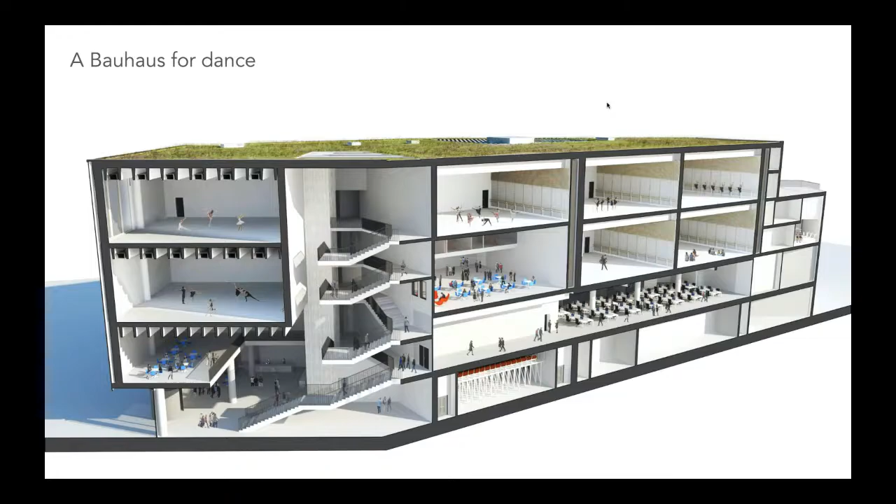I remember early on in the design process, working with Tamara, we said we could only fit in 6 full dance studios plus the large one. She said, no, we need to get all of the dance studios in, we need to get absolutely the full number in. And I said, well look, we've done our best, I really looked at how we can get all these in.

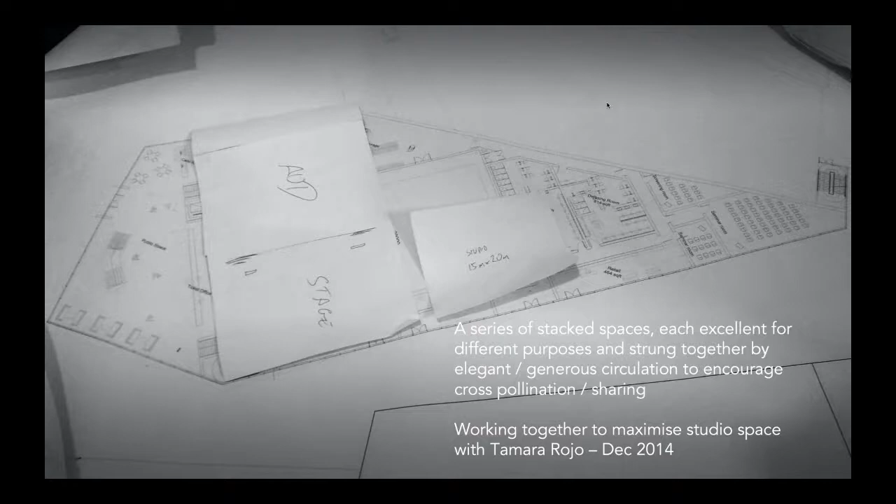This was Tamara, and this is how determined she is. She got our drawings, cut out pieces of paper, worked on them, and sent us back her version of how we moved things around. So I must admit, we can only take some of the responsibility. This was a 3-way design process - it was Space Studio, GHA, but very clearly Tamara was involved as well.

We then developed the project through a series of models, just to explain it to ourselves and also to explain it to English National Ballet. One thing they were absolutely fascinated by was not just how we accommodated and got the Rubik's cube to work by fitting in the number of dance studios, but what was the quality of the light and what was the quality of the circulation and the journey through the building.

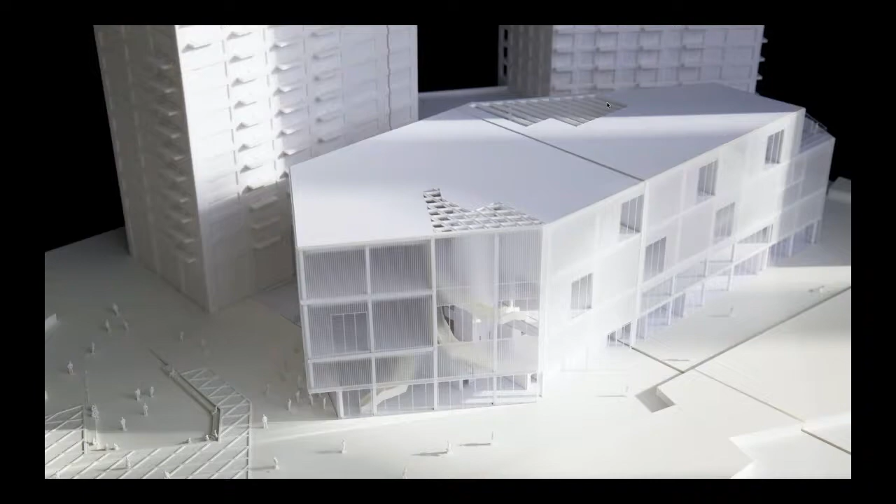So the next bit of the journey was once we developed the Rubik cube and managed to arrange all of the volumes in a really efficient way, the job then was, what's the architecture? How does the building work? And actually, the language of the architecture came from delivering the spaces in the leanest way possible. Our budget was about half, maybe a quarter, of what's typically spent on arts projects in the capital. And what we had to do was get every pound to go a long, long way.

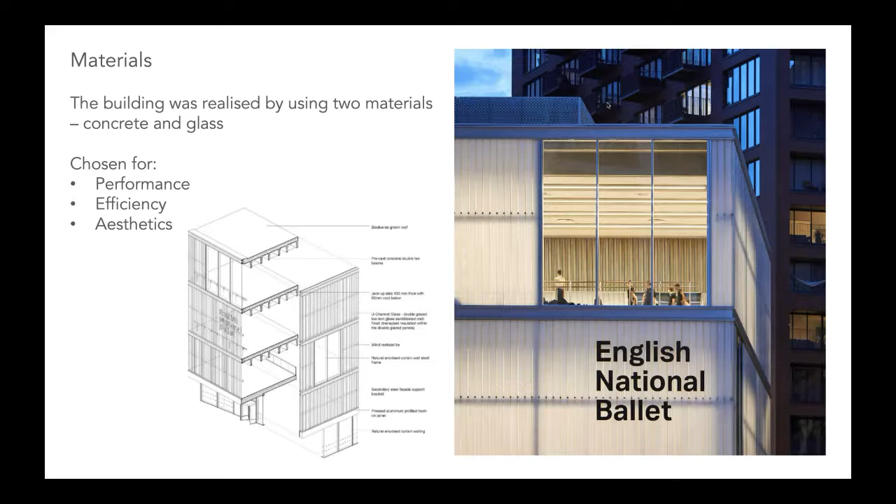So, as with many of our projects, we actually really enjoy the process of working when there's restricted resources. On this one, we started to think about the fact that we haven't got lots of extra money to decorate a building and apply lots of layers. So everything that was essential, including the structure, had to work really hard. So what we started to do was, working closely with the full team, engineers, acousticians, let the building start to tell us what it wanted to be.

One of the fundamental building blocks of this building is concrete. The reason we couldn't use steel, and it was largely a concrete building, was not only fire and thermal mass, but also the dance. When you've got up to 50 dancers in one space, all jumping up and down at the same time on a space which is 15 meters by 20 meters, over another dance studio which needs to be acoustically separate, you need incredibly stiff floors. And so that's why we went for these motorway structures - we borrowed a technology used for highways and bridges, and brought it into an arts building.

It was Dan Mulligan, who is our director partner now, that was leading on this. He stumbled across this structure, and it was an amazing tool, really. It gave us all the stiffness, very low cost, but also, by integrating the mechanical and electrical services, we ended up with a really integrated servicing strategy. So there's no exposed duct work - everything is managed within this. And on top of this concrete structure, we had the very specialized English National Ballet bespoke dance floor that we can't tell anybody about because it's a trade secret how it works.

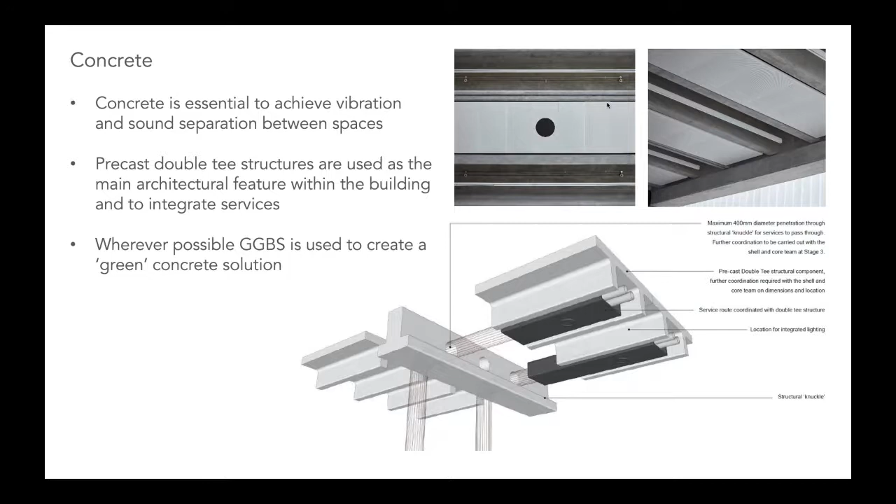Concrete's got a bad reputation in terms of being bad for carbon. But when we looked at this, we thought by using GGBS, which is blast furnace slag, as one of the aggregates, we could drastically reduce that. So as much as we could, we decarbonized even the concrete elements of it.

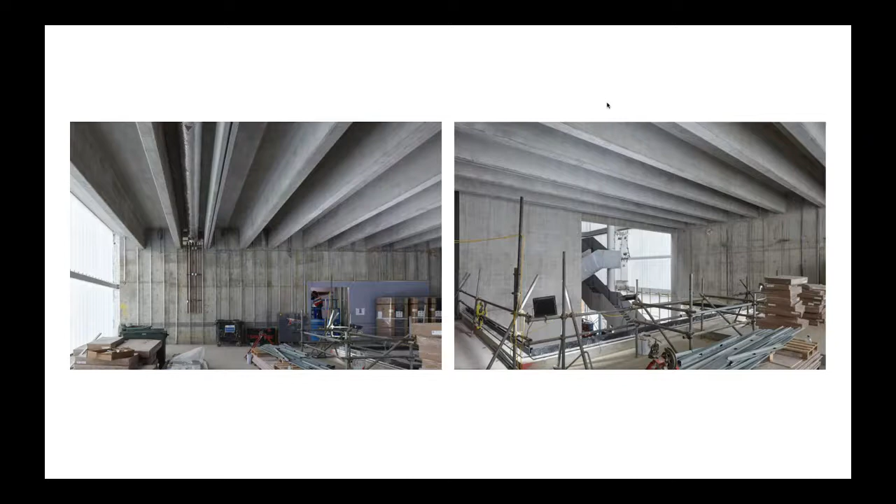These are some of those bridge structures which form the dance studios being lifted in, and what the building was like in its raw state. But what we wanted to do, and this is Tamara's vision for the building, was not to do a posh building. She wanted this building to be raw, so that when people and dancers were in it, they could sense that the building was lean and working really hard. They didn't want this to be a trophy arts project for the capital - they wanted it to be a working, gutsy factory for dance.

The other material which was absolutely pivotal to it - there's only really two materials in the job - is the glass facade. Pretty much all of the facades on this building are glazed because the ambition was to have brilliant quality of natural light inside these dance studios. The corollary of that was at night time, when the lights were on, the building became a lantern and you could sense movement and life within it.

But we had privacy and solar gain issues to manage as well in having a largely glazed building. So we used a brilliant material called Linit, which is a reeded planked glass solution, into which we can also incorporate natural translucent insulation. By sandwiching two of these pieces of glass together and filling it with daylight insulation, which is a foam, we can get diffused light in and get a lovely glowing building at night time. So it created brilliant quality of daylight in the daytime, but also allowed the building to become a beacon, a lighthouse, at night time.

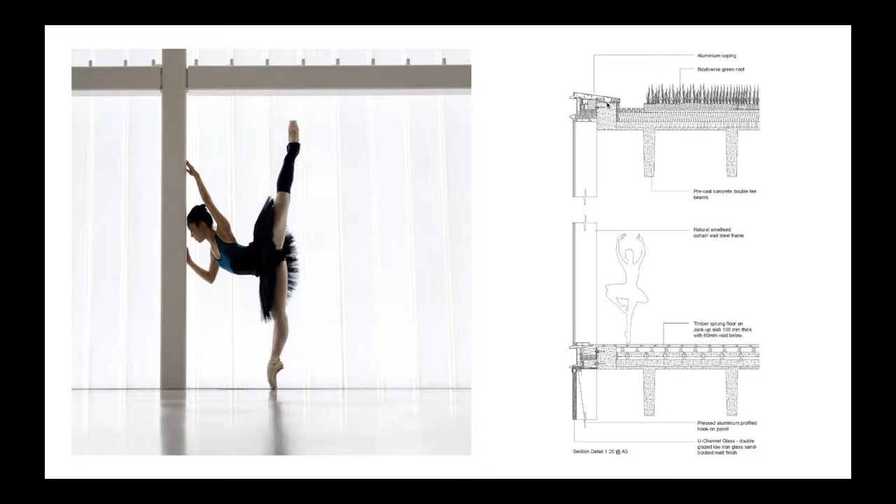This is some of the sections showing how we achieved that. One of my favorite buildings is the Maison de Verre in Paris, which again was very lean - it brought together just a glass building with a steel structure in that case. On this one, it was a very precisely crafted building, and both of these building products we didn't make, so they're off the shelf. All the maths was coordinated between the Linit panels and the double tee structures - all the maths was given to us to coordinate, and a huge amount of work went into organizing that.

And I've mentioned sustainability in terms of its carbon sustainability, which then went through to the environmental controls and using the thermal mass of the building.

But going back to the other dimension on its sustainability, economic sustainability was one of the things that the job had to deliver.

So having accessibility so the building could be used, renting out - it was a Porsche evening, and it's also been rented out to Cameron Mackintosh. So the building continued, until lockdown, to bring in a healthy revenue for the organisation while the organisation's on tour.

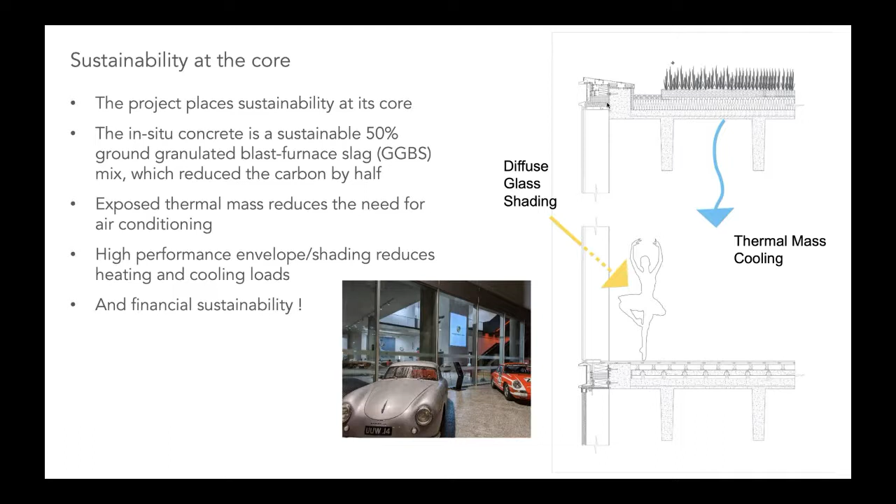I think that's really interesting - it's taking my mind back now to some of those early stages and things I'd actually kind of forgotten. So I'll try and pick some of those up as I'm speaking. Next slide, please. Next slide - I don't know who's moving the slides.

So just to clarify our appointment, we did win it in a competitive interview. I think we joined the project around RIBA stage 2, so this concept design was fully in place really. We had a competitive interview.

I remember getting a call when I was coincidentally down in London and someone saying, do you want to do this sort of training headquarters? We can't really tell you what it is. So we came for it, and then they obviously told us it was a ballet and did an interview.

And my colleague at the time, Joe Caldicott, put together a Prezi presentation that was sort of spinning around and had a kind of dynamic quality, which I think set the tone for some of the things we tried to do.

The probably biggest challenge for us, and for me personally, was to understand the world of ballet. It's not something that I'd ever been to, I didn't really know anything about it. And we spent a lot of time with the client, lots of consultation meetings.

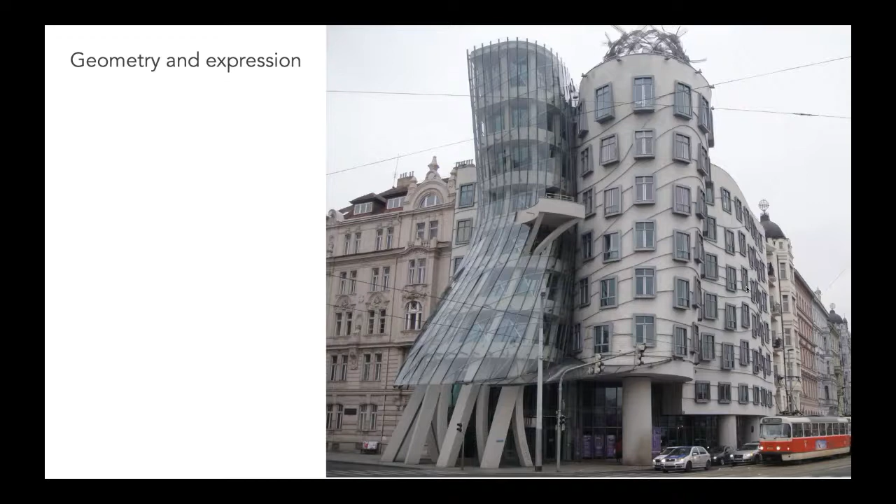Starting to think about what else was out there. This is the Gehry building, the Fred and Ginger it's called, supposed to be Fred Astaire and Ginger Rogers, two bits of a building that kind of dance together.

Then, it's interesting designing a home for ballet. It's not like a housing scheme or a university building where there's a million precedents. So Joe and I went down to see Rambert, and Tamara came with us, and that was a really interesting experience in itself. It was a very stylized, minimal type interior.

Then also went closer to home, the Birmingham Royal Ballet, Austin-Smith Lord, and a slide I didn't include but Jo happened to be in Texas, and she went over to the ballet in Houston, which I think, until the ENB, was probably the most renowned ballet facility in the world.

And then, of course, the really famous one, the bridge at the Royal Ballet School at Covent Garden by Wilkinson Eyre. And then a quote from Tamara: 'I want the space to echo the sound of creative Britain.'

So the first thing we did was take the plans from GHA, and really appreciated they've been through an incredible briefing process. We tried to look at some fairly minimal interventions that might allow us to bring some of these ideas to the fore. So you can see the reception desk - we thought about, could it be more dynamic?

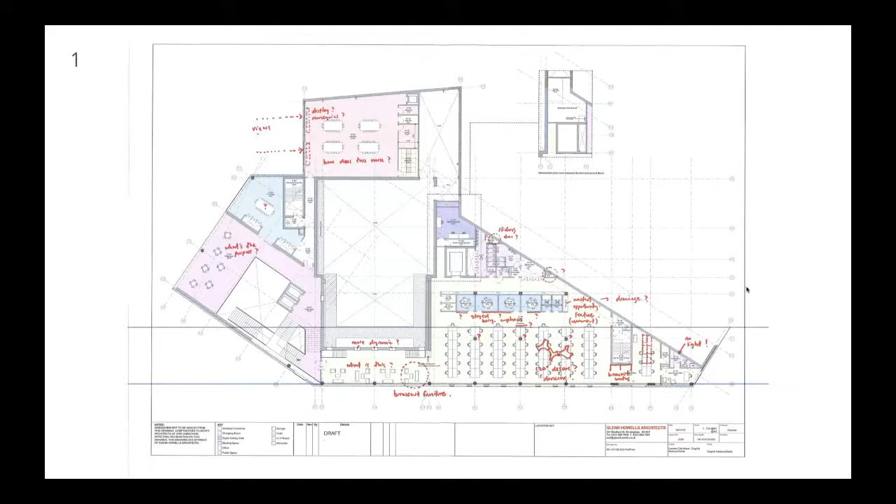Could it be curved? Started to think about some of the detail of the changing rooms, for example. Just going through the spaces, very small tweaks, just to see how we could try and bring a little bit of extra value to the project.

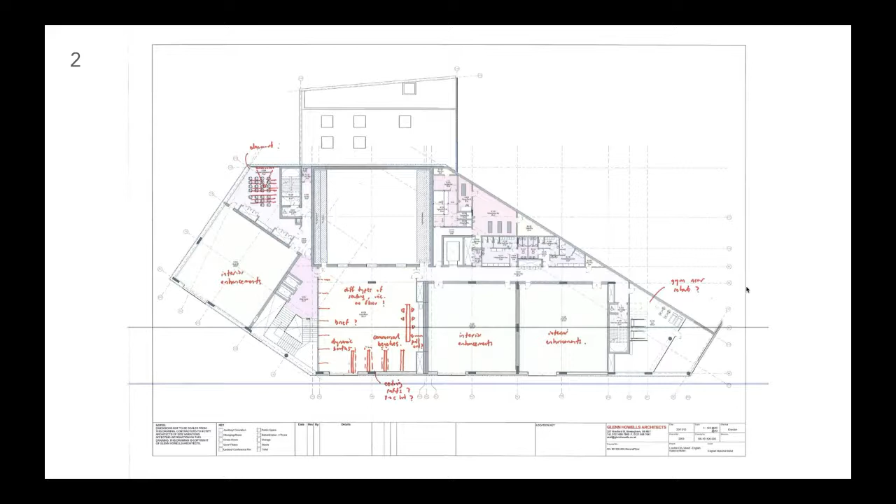And the green room there, that space in the middle that's got lots of red pen - I'll talk about that in more detail later, but that was interesting for us because there wasn't really a brief at that point. You can see it's actually very similar in size to the dance studio, so a large space to deal with there. Just smaller tweaks and so on.

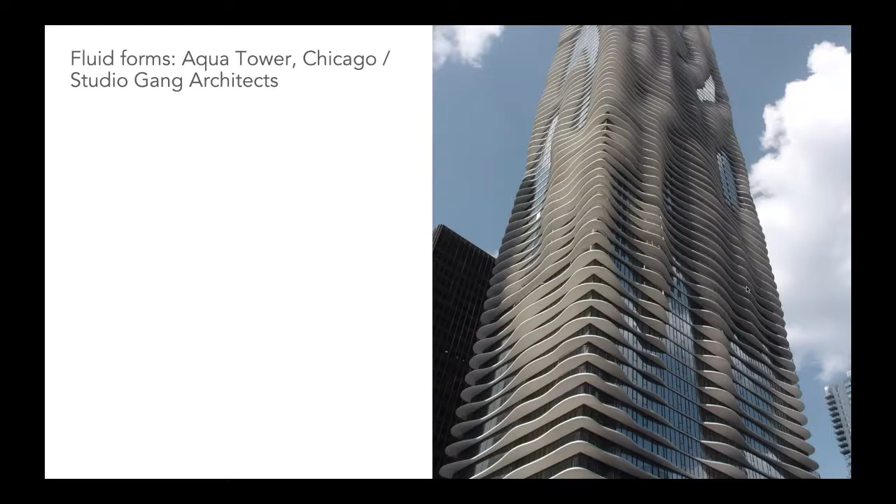Moving on to inspirations, the Aqua Tower, Studio Gang in Chicago, with this kind of dynamic quality. Tschumi's canopy at Parc de la Villette that sort of flutters along and gives that almost like a ribbon, really.

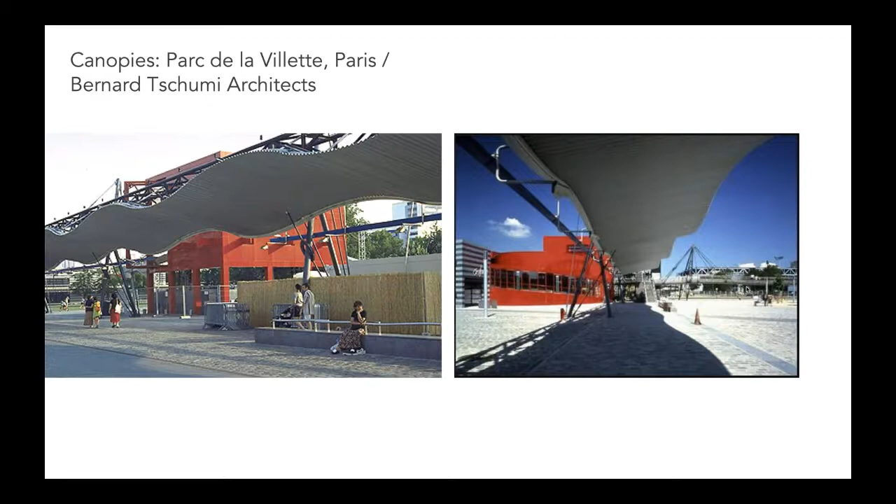And then the Casa da Música, because we'd seen the early concept drawings of the images of the foyer with the concrete, we got quite interested in this idea of embossing into the concrete, perhaps some of the graphics and so on.

And then a sculptural reception desk - this is just off the shelf, but obviously there's the ability to do a bespoke one. And then furniture that perhaps wasn't directional, that almost sat as objects in the space and gave a sense of movement.

So I'm just going to talk about three spaces really, and they had different levels of resolution when we started the project, and different levels of detail.

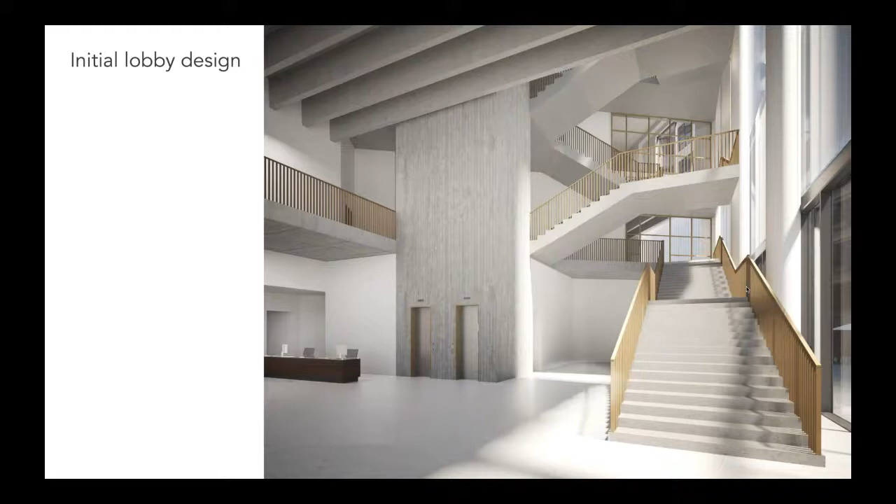So this was the initial lobby design. You can see the concrete there that I'm talking about, and the first design for the staircase and reception desk. We started to wonder whether we could get some more movement in the staircase.

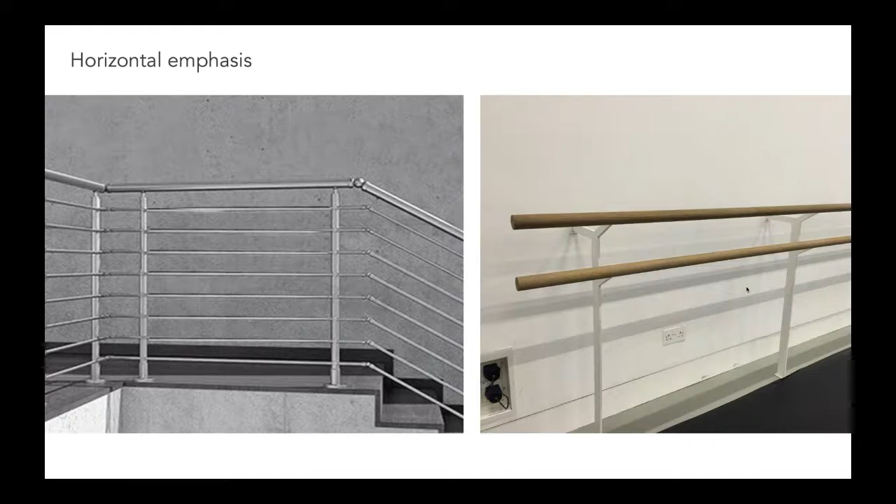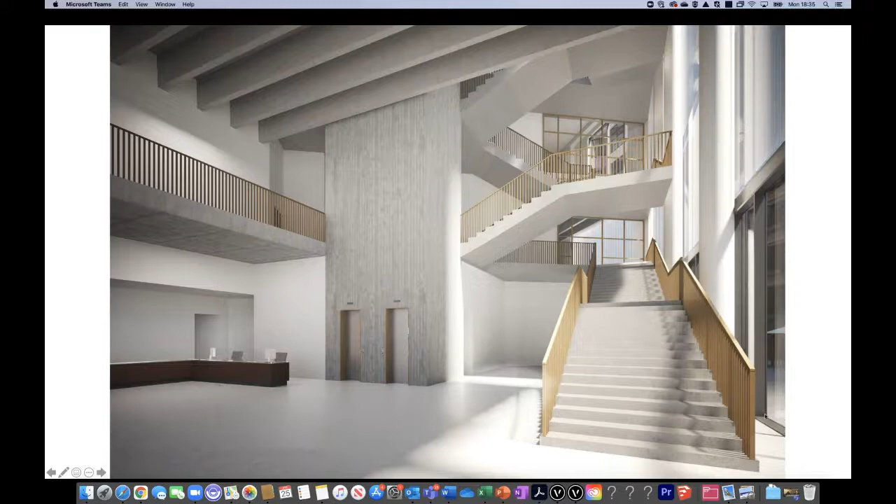So that's, again, just a reminder of where we started with the initial design, and then went through a whole series of iterations with the staircase.

First of all, just go back one - just marking up how it could have that almost double balustrade or double handrail, and making it more sculptural, thinking about the desk, for example.

And GHA modelled all of these up. This was a sort of timber, and you can see the ballet bars really that go into the distance, and the desk being more sculptural, and also the embossed concrete, going back to the Casa da Música.

This was just on the lift shaft - an idea of maybe something lighter that could be lit up at night, so much more in line with the concept of the overall building.

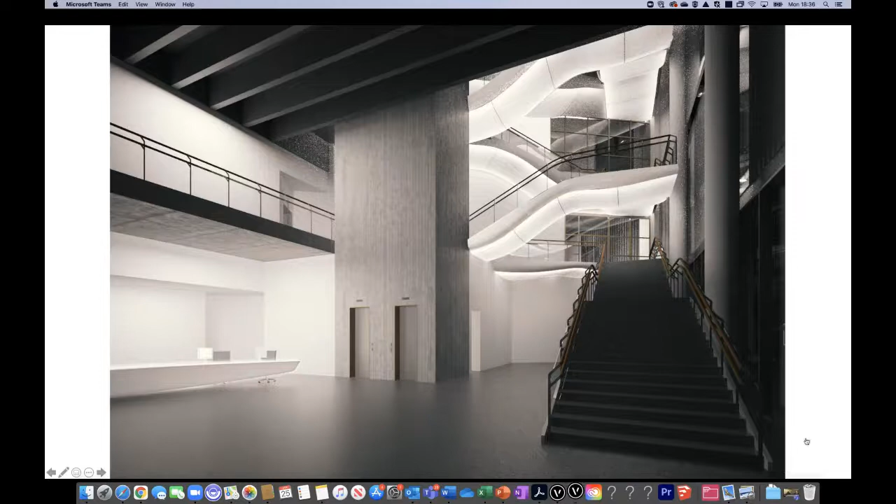I think this is what really unlocked the idea: this ribbon that winds its way up through the space. And so we got to this fantastic staircase design that... next slide.

Oh sorry, this was a winding one that came up and round. And then the next one, yeah, this is what we really hoped to achieve. I think we got it costed, and it was about £1 million in itself, so we had to rethink that. But you can see the principle here, and then it shoots out at the end. At this point you can see the logo is embossed into the plasterwork there.

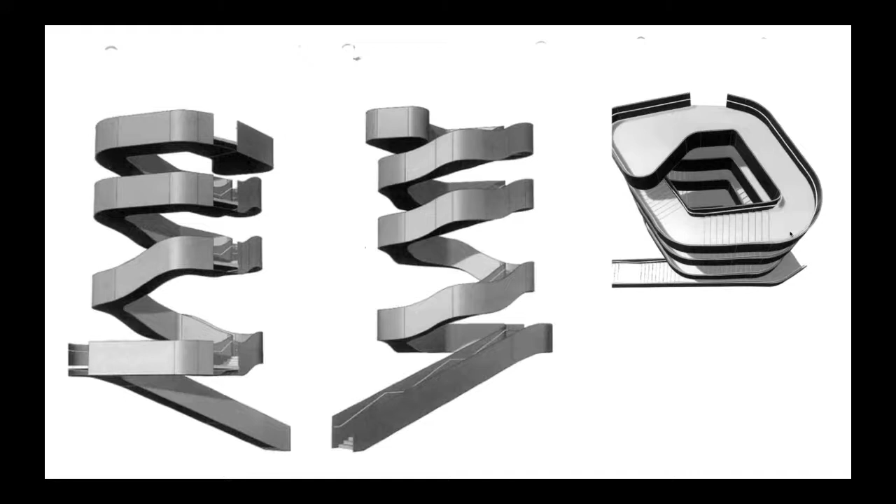This was actually my highlight of working on the project with Glenn and Dan and Rob and the team at GHA, when we started to get to this idea of the staircase that moved up through the space, and we moved from doing sketches straight into the studio. Somebody started to model it, and it was an incredible experience to spend so much time focusing on one element.

We'll come back to this later. This is the finished article.

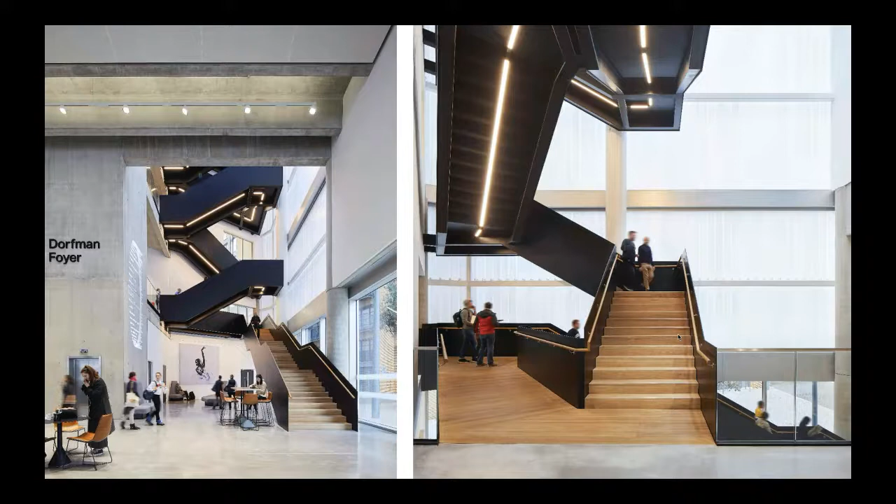So the second space I wanted to talk about was the green room. As I said earlier, it was effectively empty.

We also had this idea about what we started to call the pit, a sunken area. This was going back to Amber from the dance company, saying that people wanted to stretch out, they wanted to sleep everywhere. So we thought, if we have a pit that people can lounge around in and stretch, that could be quite fun.

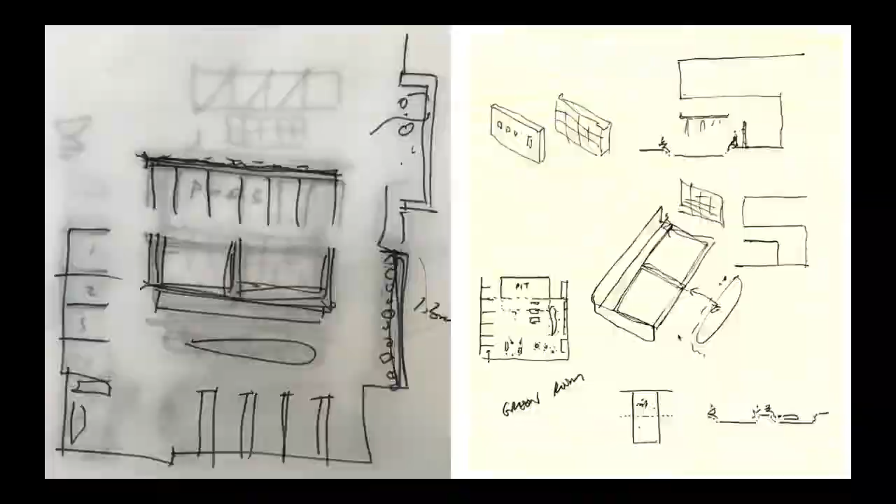What was very interesting about the green room is that the rooms from above look down into it. Again, you can see just a version there of the iteration.

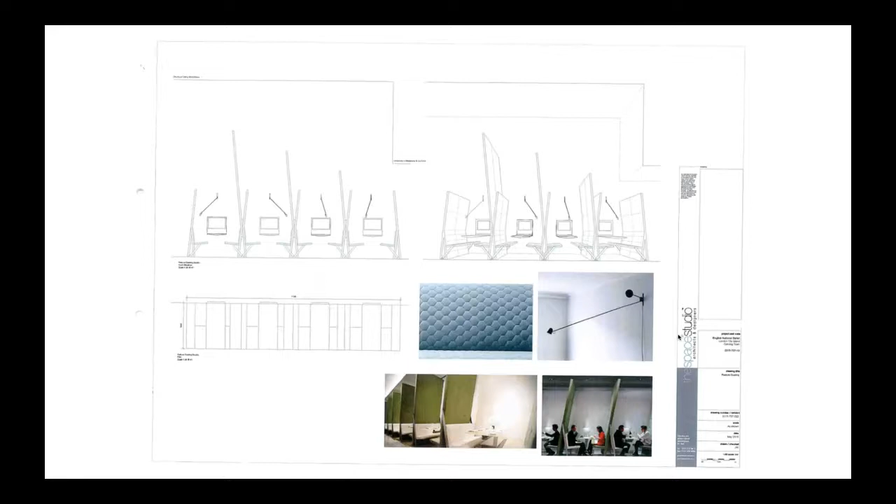Here's the booths that we designed that dance through the space, and they step down as you get to that mezzanine floor. Then the sleeping pods that I talked about, and I think my colleague Rachel spent an awful lot of time trying to find out upholstery details, mattress details and so on.

And then the dressing rooms, this is one where we very much inherited the space available. Going to the ballet, you could see the absolute carnage these are often kept in. But actually, the skip is one of the most important things for dancers.

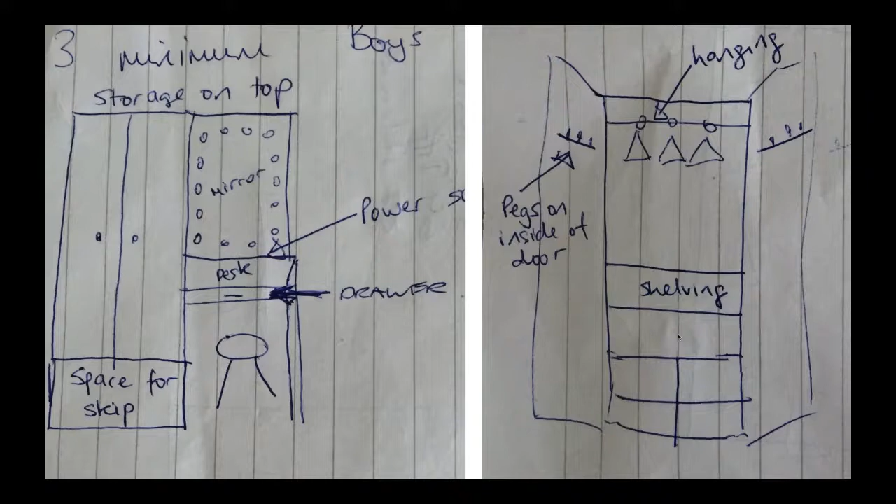As Glenn explained, the ballet is a touring company, so every dancer has a skip, and that skip needs to be put somewhere. This, I hasten to add, is Amber's sketch, not mine, in biro pen, but it talks about the absolute need for somewhere for the skip, somewhere for them to get ready, a mirror, storage, etc., places to charge the phone and so on.

And then just finally, in terms of the interior, the furniture selection and procurement. This was obviously the breakout furniture, but the office was a key area. For a long time, we explored these sort of pods that would give us some really interesting meeting rooms in the space.

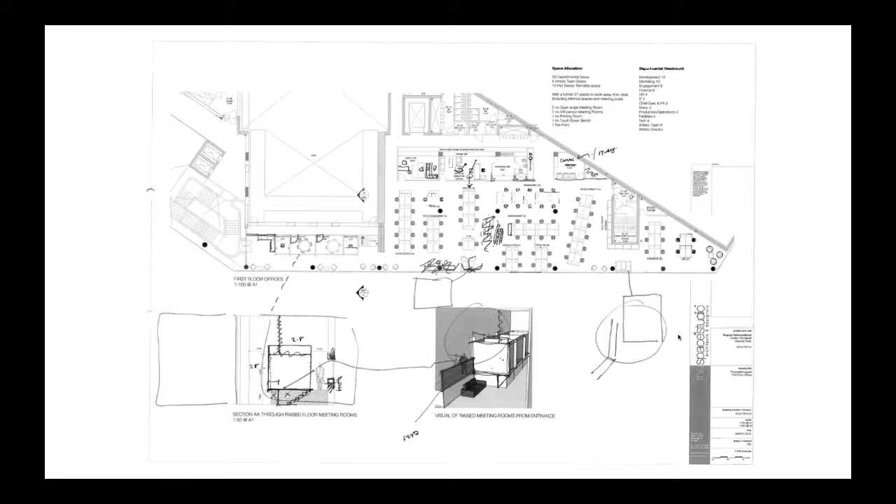And then just some other ideas for how that office could be laid out.

I remember one of the real challenges: in the first instance, Tamara's office and changing area was in the corner of the building, which was the prestigious area. And then finance and HR kept saying they needed more privacy. So I was tasked with the job of saying to Tamara that we needed to move her office into the core of the building. Being Mediterranean, she was very concerned about the daylight, but she said for the good of the team, she would give up that prestigious spot in the corner.

And I remember when we signed off the plan, I went to high five her in this meeting, and everyone was just aghast. Nobody touches Tamara, nobody engages with her like that, and she returned the high five, and the whole meeting breathed a sigh of relief, and we knew we'd signed it off at that point.

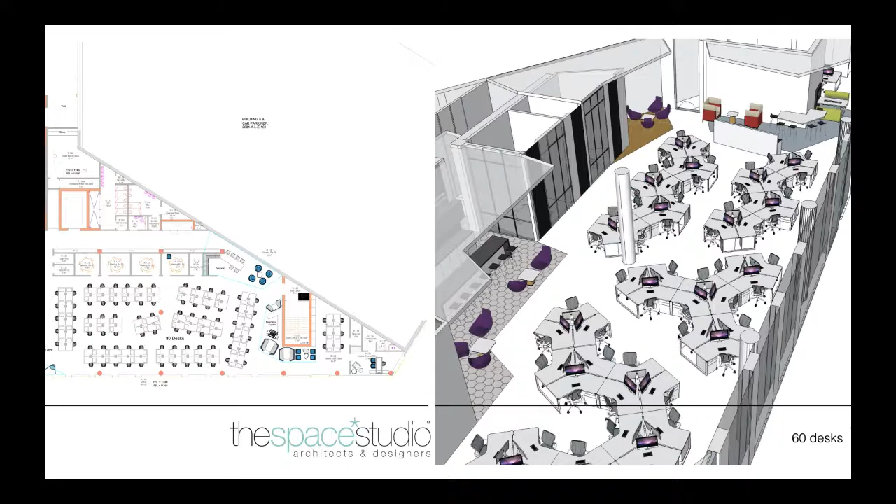And then just in terms of the furniture, we arranged a furniture day, mostly around Clerkenwell. We had about 15 representatives from the ballet who came round and looked at furniture, everything from desks and office chairs through to breakout furniture, reception furniture, meeting furniture, and so on. We spent a whole day going round.

And then that was pretty much the end of our involvement as the project went onto site. So I'll hand back to Glenn now.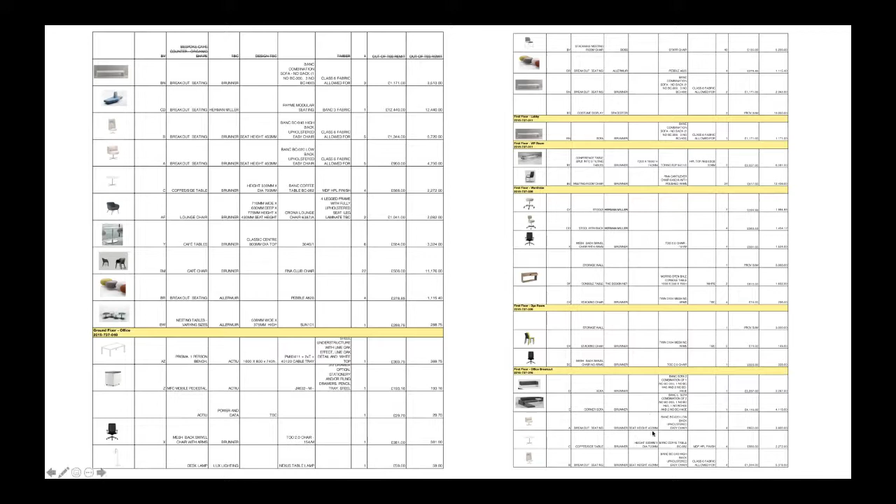Thank you. Can you hear me, Kevin? Yeah. What we're going to do now is jointly take you through the building. We've given a few tours to judging panels and to other architects and designers. What we've tried to do is show some pictures with some drawings as well, just to give you a feeling.

So we'll take you through as if we were walking through the building. This is the foyer. The first thing you see is the staircase that Kevin and I sweated with Dan and others on for so long. It was this balancing act, and at the end, I think the idea of it being a ribbon, Kevin, still holds.

It does, because even though it's made out of flat pieces for a number of different reasons, its solidity in the space and its differentness to the concrete - it's so much better that it wasn't a concrete thing, that it's a lighter thing and it climbs up.

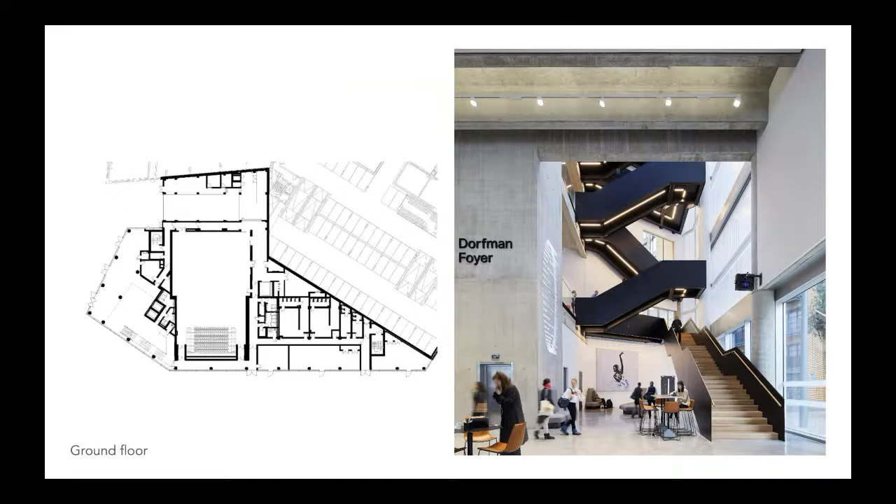And it's also, you can see how the building, how the staircase - because everything's working really hard on it. The handrails, the flat metal 20mm sheet handrails, are part of the structural solution. But there is this idea that the staircase is a tool, it's a communication device. It's wide enough that you can hover and have conversations. And very importantly, as you go up through the space, you can see all the different parts of the building.

And what was also good, you can just make it out on the left hand side, it had a kind of split in it depending on how you arrange it. So as you arrived at the front door, you could actually see through the furniture to the reception desk. That was a really instrumental piece for us, and it could be split up and moved around.

A big part of the project was revealing the story of the building, the concrete and glass story of it, from the foyer space. So even though it was essential for the dance studios, we didn't want to change the language of the materials and the vocabulary of the building in any of the spaces.

This is an informal space on the first floor, used for receptions, for fundraising activities, and actually just as a living room. It also brings in revenue because it can be hired out for events as well.

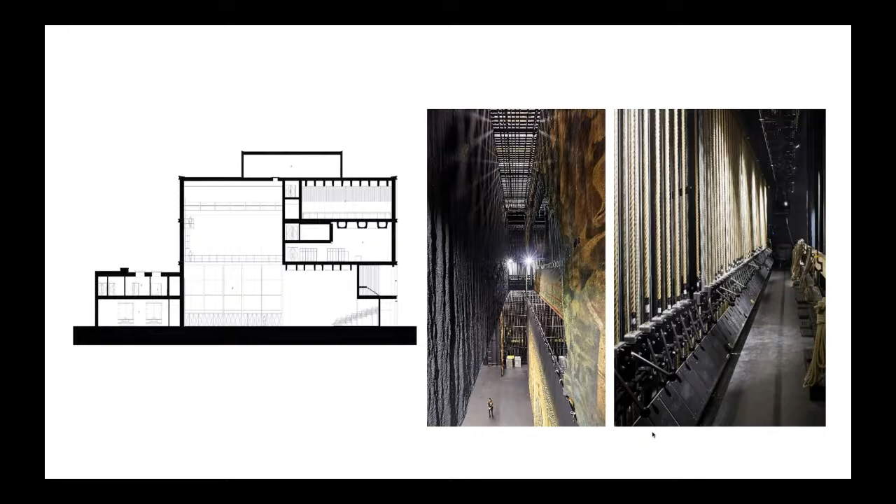I suppose this space, which was Studio 1, was the hardest working and the most difficult to work, because it's like every other dance studio, but as you can see from the section on the left hand side, it's also got retractable seating. So this is a little mini version of the London Coliseum. It's got a very large stage with wing space, and very importantly, a full fly tower. When you go in there, it's like a Rubik's cube that everyone can't believe, because this is on the ground floor, but the height of the fly tower goes all the way up to the tallest part of the building.

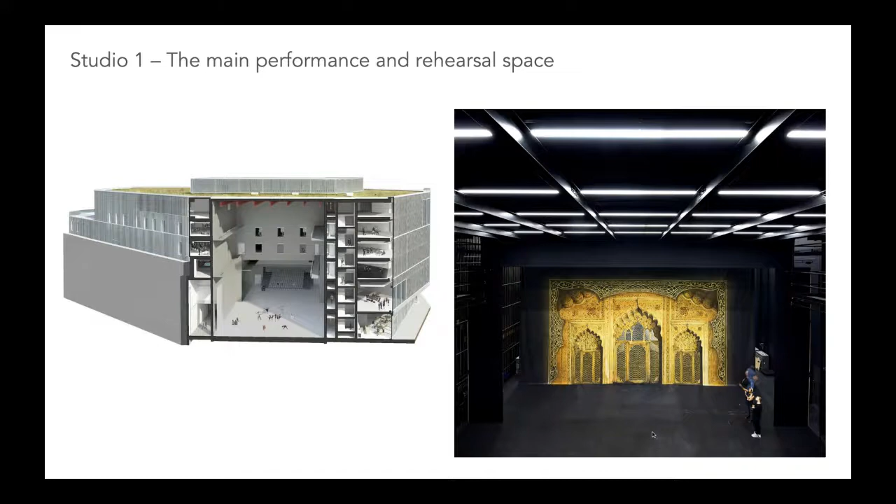So this was the full technical setup they got, with full counterweight rigging. It's got all of the hanging and flying facilities, and it's also this space that organisations like Cameron Mackintosh use for their productions. They can hire it out to other producers to bring in money.

And then these plans just start to show how we then manage the larger spaces versus the smaller ones. The smaller ones wrapped around them, every little corner of space was used.

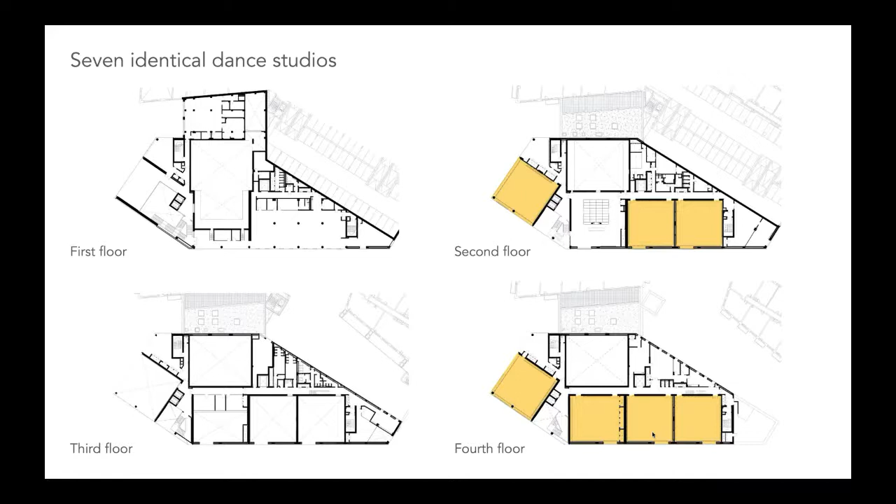This is the one job where, because the brief included hydrotherapy - a swimming pool in there for therapy - workspace, sewing space, every corner of this building was made to work very hard, wrapped around the engine, which is these dance studios. And this shows the quality of light and the volume inside those dance studios.

And then wrapped around those spaces such as this, which we worked on, and Kevin's team also worked, understanding what the adjacencies were. So you got dyeing rooms, fabric rooms, stitching rooms, storage spaces. This was a factory wrapped around all of this. So it was a factory for dance, but it was also a manufacturing space for everything else that needed to go on tour.

I think we had an hour and a half meeting with the lady that made the shoes, for example, telling us about the shoes, and that depending on your rank as a dancer, you get more shoes per month.

The other really fascinating one, similar to the space that Glenn was talking about, was that they keep records of all of the costumes they've done previously and material samples, so that next time a particular ballet goes on the road, they've got all of that information for continuity purposes.

So how all of that information is stored and the size of those books and so on, it's an incredible amount of detail that you probably would never think about when you see this, because everything has been thought of and designed for.

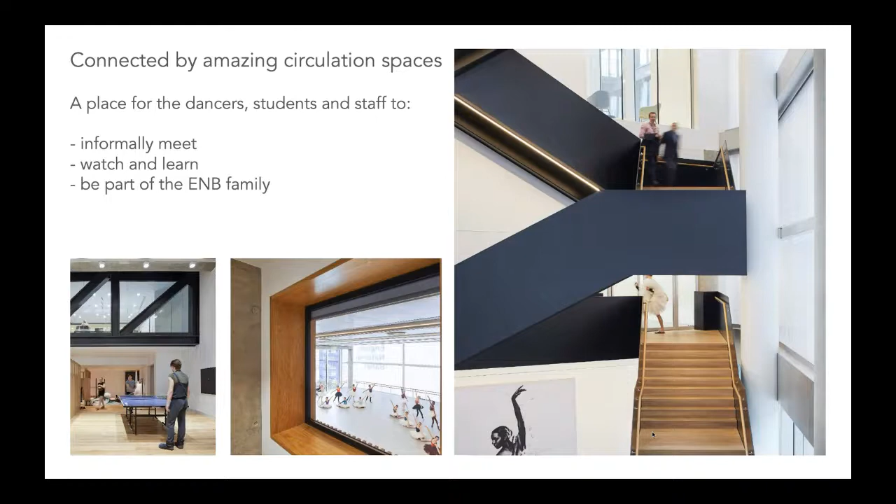So I think we've pretty much come through to the end. There's lots of other slides that we took out because otherwise we'd never contain this to an hour. But just in terms of summary, it's not just about a great building for English National Ballet - it's been recognised as being great for the community. The Mayor of London has invested through the Good Growth Fund, and it really has made connections to the local neighbourhood.

Speaking to Tamara recently, she said one of the things she's most proud of, affirming her decision to move to East London, was the warm and vibrant relationship they've got with the local communities - links with schools, and as Kevin said, with the Parkinson Foundation as well. So it really is now a breathing, living part of this part of London. One could argue that English National Ballet has brought life into London City Island - it wouldn't have been the same place without it. It's been even more sought after as a desirable place to live since English National Ballet decided to base itself there.

So I'm not going to read out all these things - these are some facts about all the people it's reached and what it's done for the organisation.

But I suppose that was the crowning comment really, and we didn't force Tamara to say that - she went on record, and this was in her speech when she stood up on the opening night in front of the Mayor of London and all the other funders that allowed it to happen, including the Arts Council. She said, and it's not because it was posh or a trophy building - it actually did everything she wanted it to do, which was to be a place where dancers could make amazing work. That's why she said it, not because she doesn't like the building - the building is most important and most successful in that it is a vehicle to do great work. That's why she said it's the best ballet center, or the best building for dance, actually, in the world.